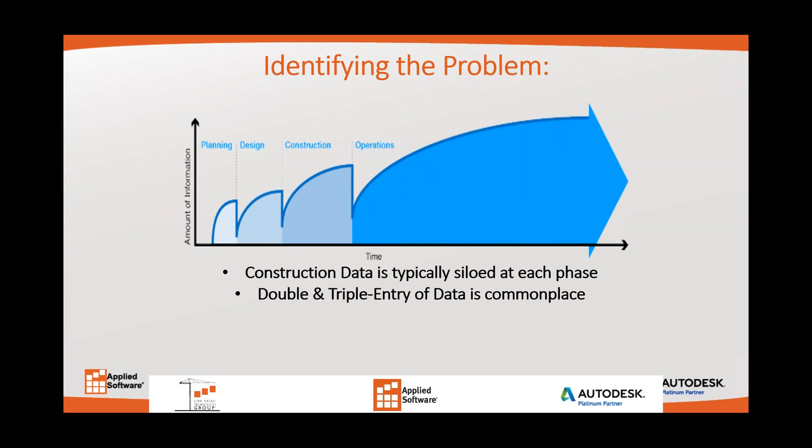So most of the construction data that we get is lost at the handover of each construction phase, and so a lot of times that causes double and triple entry of data and a lot of wasted time. Also, currently a lot of field teams don't trust the model because of the data loss. So there's a frustration between the field team and the BIM team.

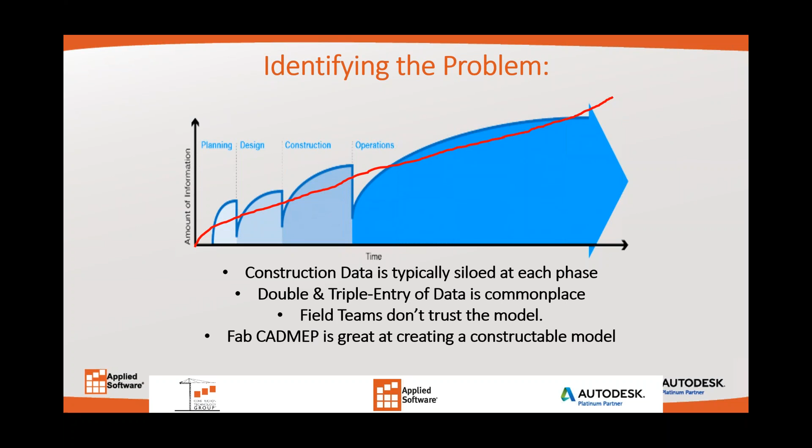So what we want to do is we want to take these peaks and valleys and we want to make it a slow, steady incline of data in our model and for our construction site. And design programs like Fab CADmep are great at creating constructible models and at collecting data, but they do need a little bit of help getting that data out of the model and into the field.

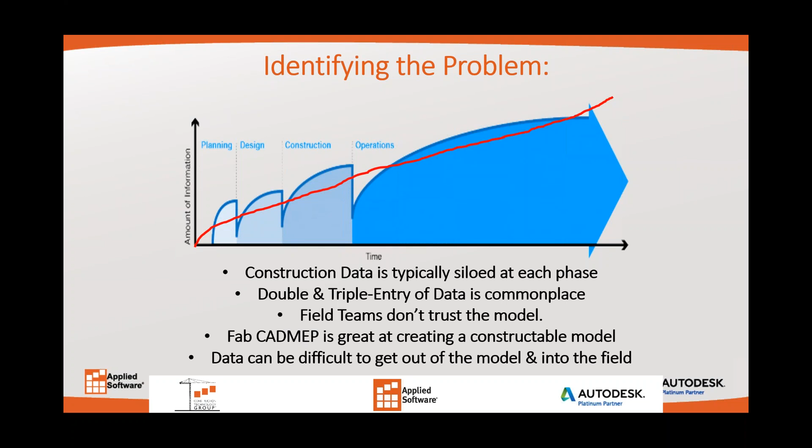So what we suggest is leveraging your fabrication data into the field. So using our FAB to BIM 360 add-in in Fabrication CADmep, you can much more easily manage and leverage the data all the way from design to coordination to construction and then finally to turnover. So the demo that I'm about to show you will give you an example of how you can do that.

So I'll quickly go over the workflow here. We're going to start in CADmep and push the model up into BIM 360 Glue, where we can coordinate and revise the model. Then once coordination is complete and we have a fully coordinated model, we will use our FAB to BIM 360 tool to essentially attach spool data, or attach data to blocks, so that we can push that data into BIM 360 Glue, okay?

And then eventually into BIM 360 Field so that we can track the status and all that data during construction. So while we're in construction, we can attach submittals, shop drawings, O&M data, any COBie data, track statuses, etc. And then eventually, once it's time to turn the project over to the owner, we can very easily push everything into Autodesk Building Ops so that the owner can better operate and maintain his building. Okay, so essentially that is the workflow that we're going to go through today.

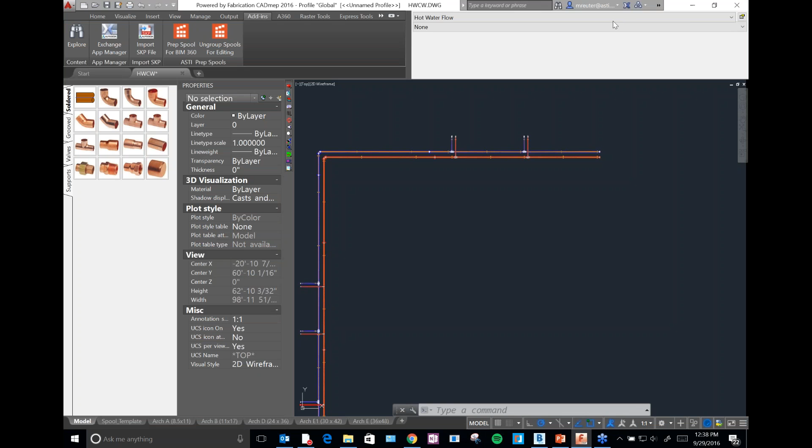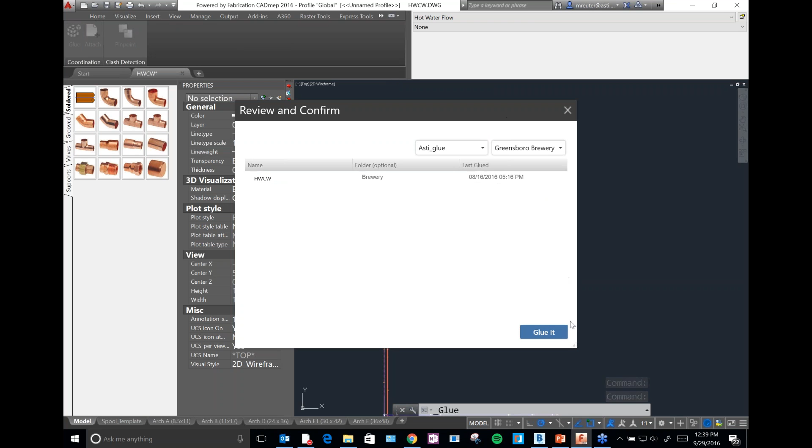So we're going to start in FAB CADmep. Basically you're going to want to design your system just like you normally would, leveraging your materials database along the way. And once you've got everything ready in there, all you're going to want to do is hit the BIM 360 tab and then glue your model to Glue. It's pretty simple. All you do is select the project that you want to glue it to, and then you hit glue.

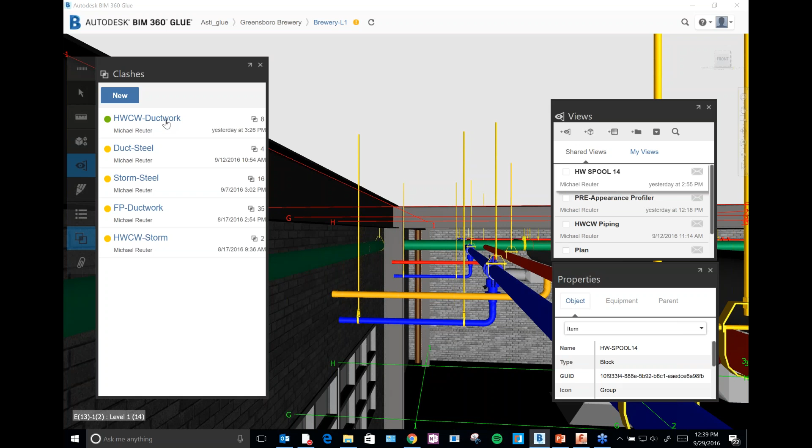So when you do that, the model opens up in Glue, and what we're going to want to do now is actually create clash tests against the other trades. So when that pops up, you're going to see actually 8 clashes show up here. So for this exact instance, we're actually doing pretty good. We're almost at the end of the coordination process.

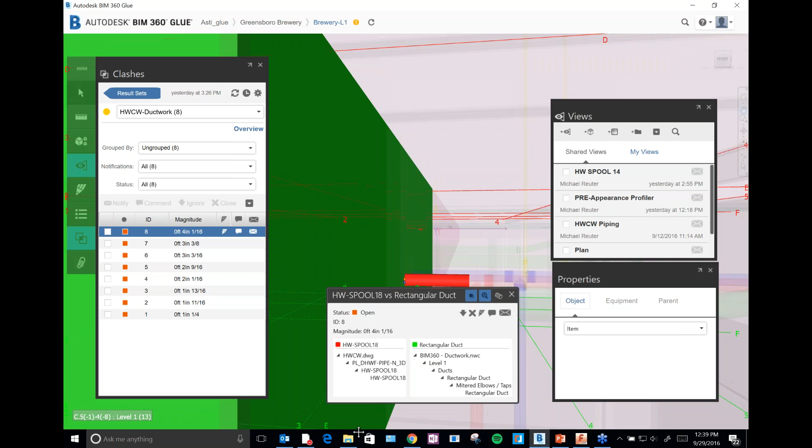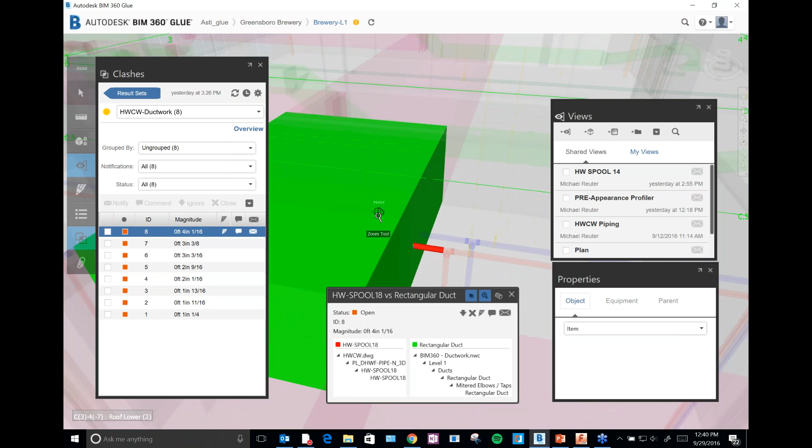So what you see right now in this clash number 8 is that as I pan up, there's a pretty major clash between the duct and the hot water and cold water. So once you zoom out, you actually see that both the hot water and the cold water are going right through this duct.

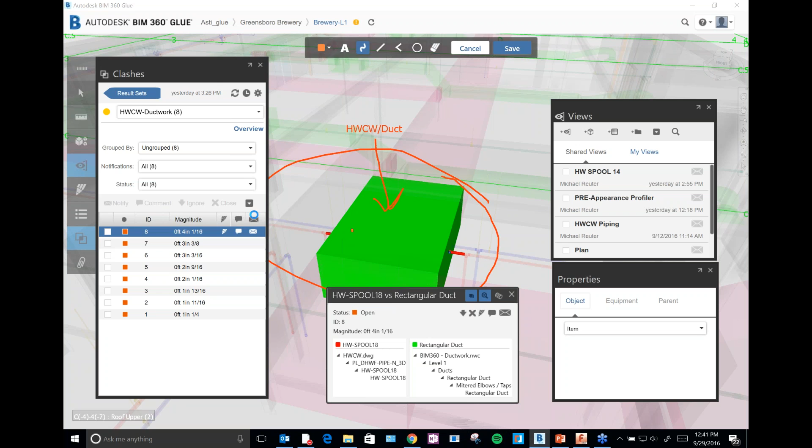So what I'm going to do is just create a markup of this, and so I'll circle it, and then I'll even put a little comment on there, and I'll say hot water, cold water versus duct. Okay, put an arrow to it. And I will save it. Okay, so next I'm going to give a comment based on maybe a suggestion or just a comment on what we're going to do here. So I'm just going to say,

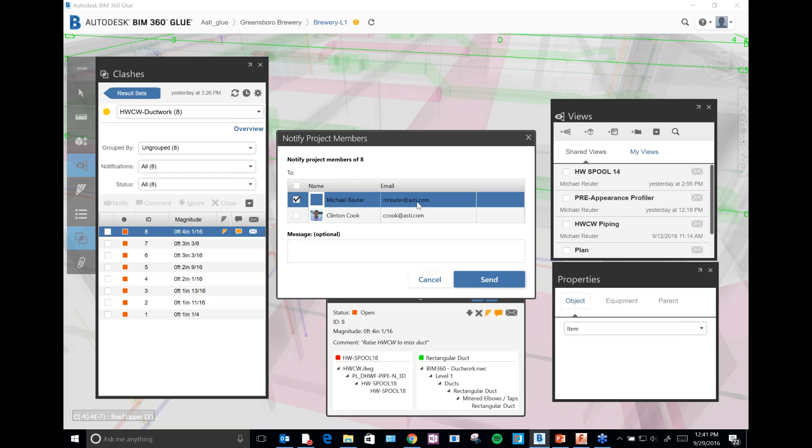okay, and so then I'm also going to finally notify members of the team of the issue. You could do that 2 ways. You could either notify yourself, or you could notify another team member so that they could do it. So when I actually do this, it's pretty cool. You're going to see here in a second that a little email notification is going to pop up.

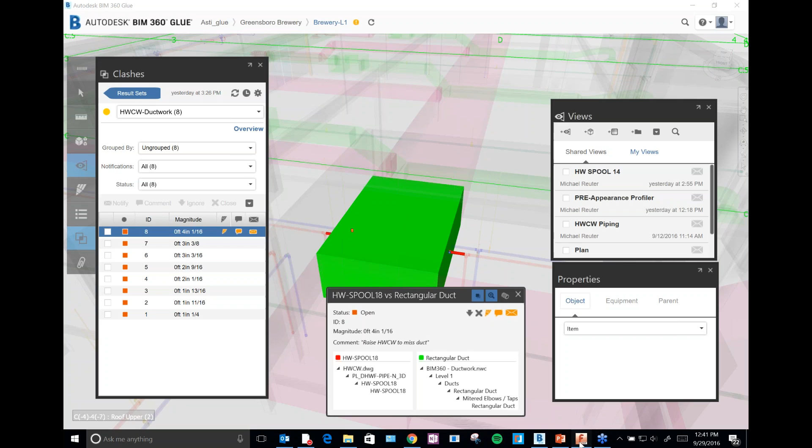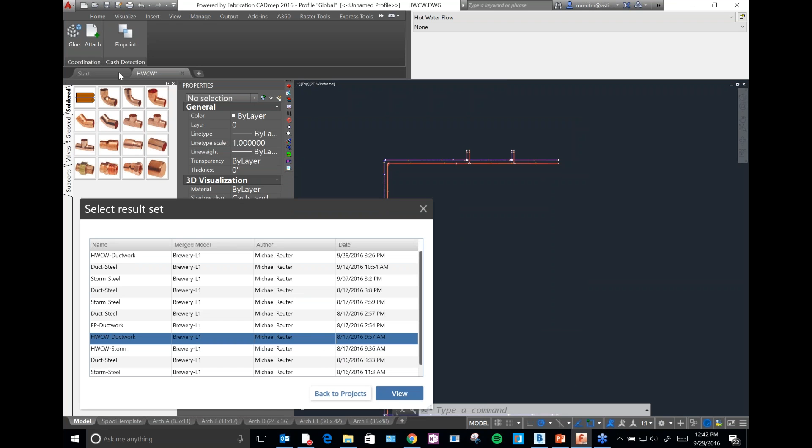So 2 things happen when you send the notification. One, you get the email, and there's a link inside of the email that when you click on it, it brings you right to this location in the model so you can see what's going on. And that's pretty cool. But the best thing about it is that it also sends information to Clash Pinpoint. So all you have to do is, if you're coordinating your model with Glue, you run your clash test, you send a notification out about those clashes, and then you hit the pinpoint button right here, and this little result set comes up.

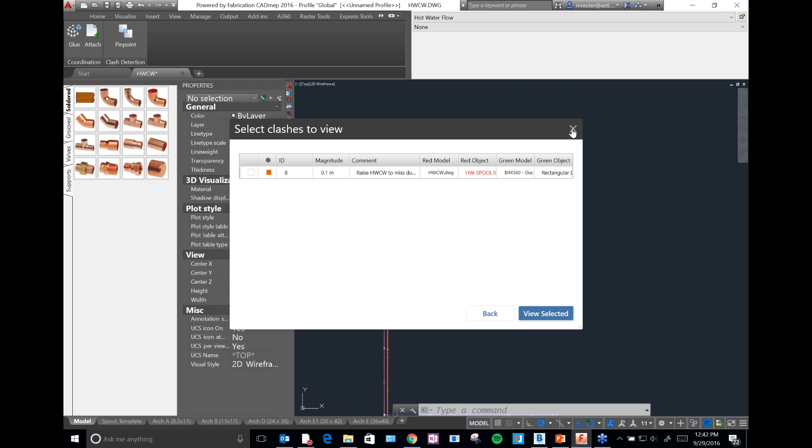So we were just working in the hot water, cold water versus ductwork. Actually, we were just working in this one because it just ran. And so we can go to view there, and what you can see is basically all of the information that we just did. Okay, so we said need to raise the hot water, cold water to miss duct. If I select this, then it would take me directly to that spot in the model. Okay, so Glue helps you quickly coordinate things, and you can even bring the clashes back into your model.

So once we're done with coordination, now it's time to start creating our spool drawings and setting up the model for submittal. So that's all that I'm going to do right now.

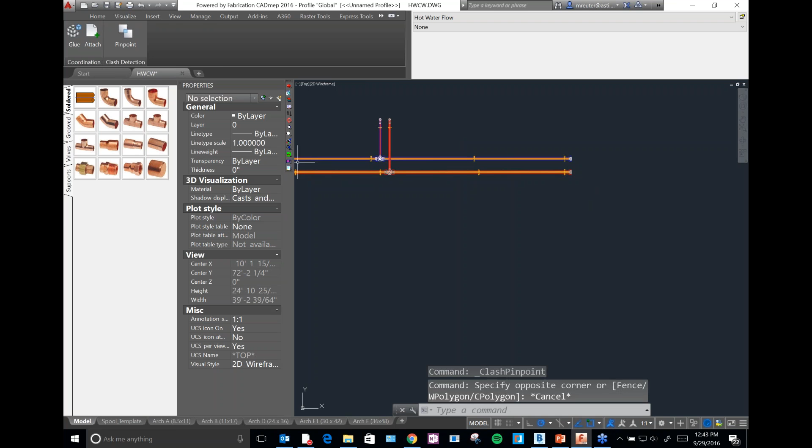So I'll just hit this spool button right here. We're going to name this hot water spool number 1, and then I'm going to select all the items that are part of that spool. Right now I'm just doing that for an example so that you can see the process.

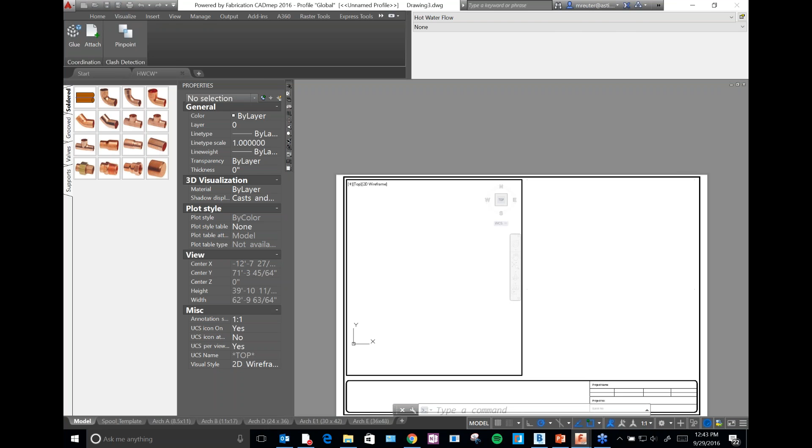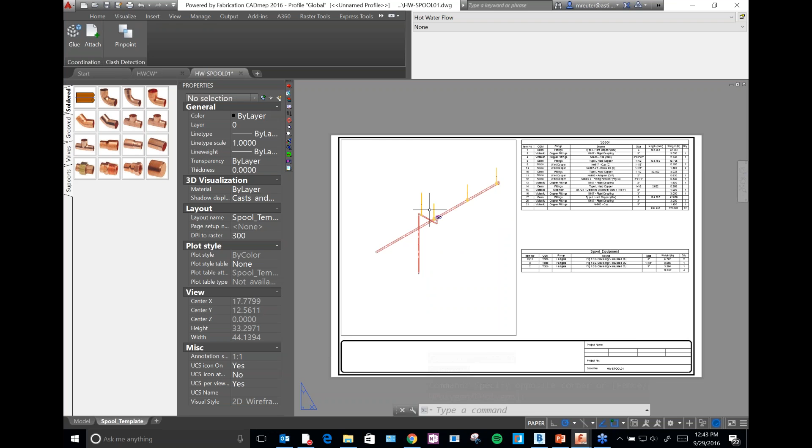Yes, okay. So then once we do that, as you guys know, it automatically creates the shop drawing essentially for that spool. You could annotate this however you needed to, and then what's great is that it automatically gives you a schedule and all the information that's involved with it. So we will actually use that later, and we'll attach that to our stuff in BIM 360 Field. But you guys are already doing that right now.

So here's where the workflow kind of changes. Once we've got all of our spools done, we actually go to our add-ins and we hit the Prep for BIM 360 tool, okay? And once we do that, we just hit Group. And when it groups, it's automatically going to group all of our data together. Okay, so it's done right there.

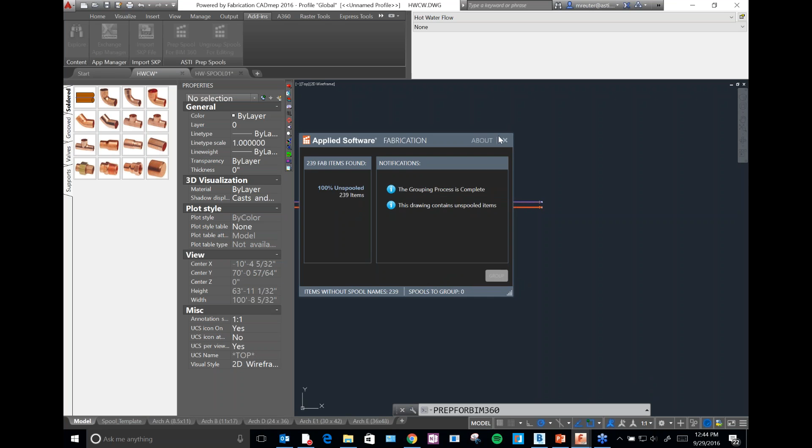So what you'll see is before, each item was one piece. I didn't spool this stuff up above, but what the spool tool did was it actually combined this whole spool into one object. So when I click on it, you see all these attributes are now added to this file. You can see the name of it, the status that it's at, what it services, the weight, material, all of this data.

We can customize this data, so if there's other key performance indicators or key indicators that you guys use, we can add attributes in here. But right now, these are the only ones that we're tracking for this project. So again, once you've got all your spools set and you've prepped your file for BIM 360, you just go back and you Glue it again.

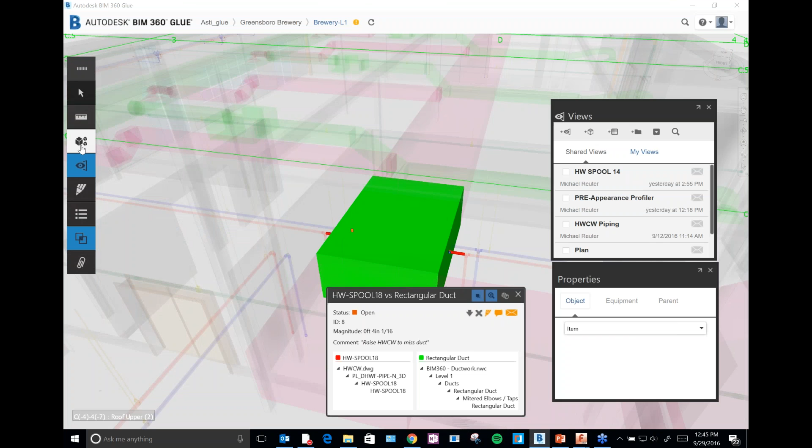So then when you go to Glue, what you're going to see is, let's see, we'll just click on this one right here. Bear with me, it's going a little bit slow because we're webcasting. Okay, great.

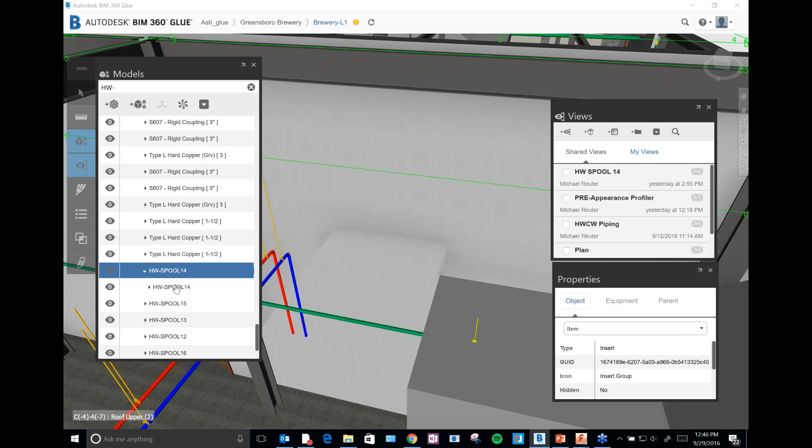Basically, once you select that item, we can go to that attributes menu in Glue, and you can see that all that data is now here. So I can create equipment types based on any of this information. I can bring any of this information from Glue into Field however I want. So all that I would do is right click and choose to create an equipment set called spool, and then I would share it with Field. Okay, so now that we've got that done, we'll actually go to Field.

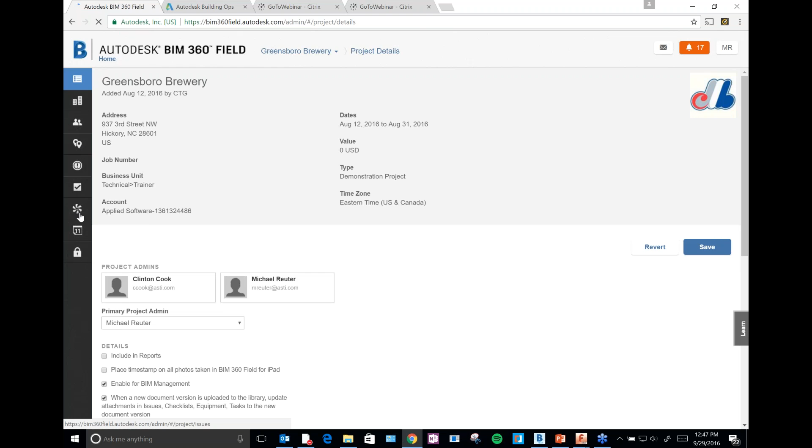Okay, so the next process is I'm going to show you how to actually map your model from Glue into Field. You just go into the project admin of Field, hit the equipment module, and you can either add a model from Glue, or since I've already got it done, I'm just going to select manage equipment mapping. You can see we've got our spools in there, so I'll show you how I mapped it.

The first thing it prompts you to do is select the equipment type. You can set this up beforehand, so any piece of equipment that you want to track, we can track, and any piece of equipment that you want to attach data to, we can do that with the FAB BIM 360 tool. Right now, for this example, we're just doing plumbing spools, so I'm going to hit next. Next, I'm going to choose to map it in advanced mode, because I want to choose a number of attributes to bring over from my FAB model into Field.

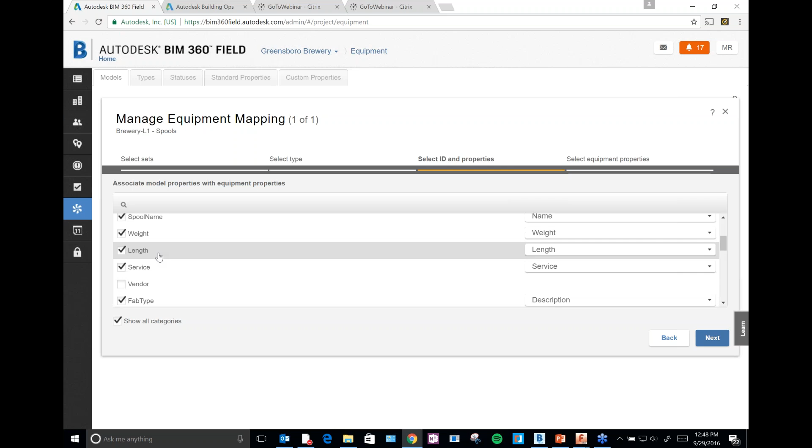So again, our attributes menu shows up here. I want all of this data that I've got selected to go from my FAB model into Glue and into Field. All of this data that we've already collected is coming seamlessly into Field, and it's connected to our model. So whenever anything changes in our FAB model, it'll also occur in Field. We've got the FAB type, the service length, the name.

Okay, so the next thing we're going to do is select the items that we want Field to push back into our model. I've just given a bunch of examples here. We've got the issues, the building location, the install date, barcode, name, the status, all this stuff. Once you're done with that, you just hit save mapping. And then essentially all of those items that are in your model would become searchable and editable in Field.

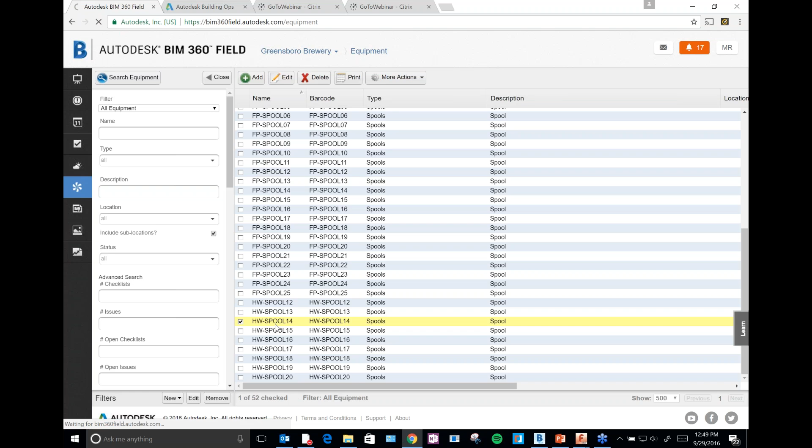So I'll show you what that kind of looks like. Okay, so I'll just click on the equipment module again, and then we'll go down to, I think we were working on spool 14. So I'll just give you this as an example. So we'll just double click on hot water spool 14. And so you can see all this data is already in there.

So, let's say that we had maybe the status of this change, so we can actually change it right here. Or maybe we got a little bit of data information, and the spool was actually installed today, so we would actually want to mark the status as installed. Okay, well, we could do that. And so when we actually do that, you can see that the process is pretty seamless. So I'll show you right here.

Again, bear with me. Okay, so you can see that it changed. That stuff already updated here. So we've got the install date, and we've got that the status changed to installed. So that took literally 5 seconds, and then the database notified Field and Glue that everything changed.

Okay, so let's review now. Okay, so a couple things to remember about FAB BIM 360. So we created it to simplify the equipment tracking process for construction, specifically for fabrication models. And what it does is it sends data to BIM 360 Field and Glue that otherwise would have been lost and or re-entered during the process.

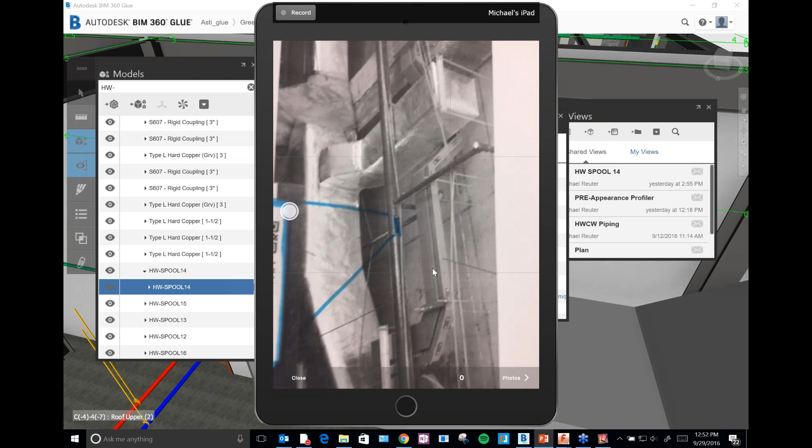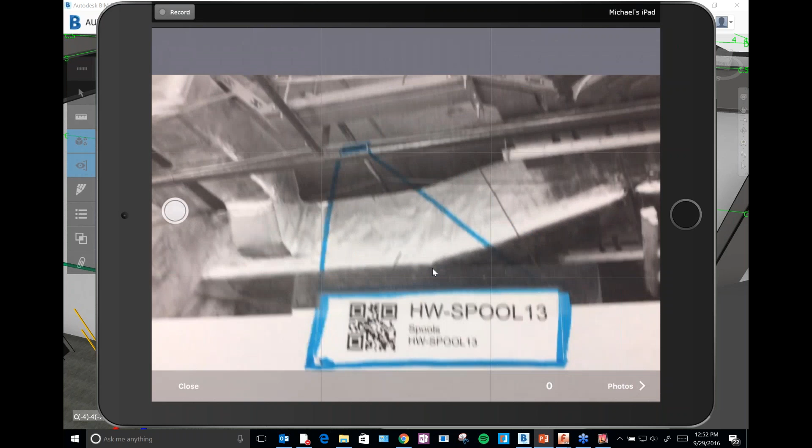Okay, so basically what I'm going to do right here is, well, I'll show you. I'll just take a picture first. So essentially, let's just imagine that we just installed this run of pipe right here. Okay, so then when I look closer right here, I actually see that there's a barcode right there. And so, right here, you see there's the barcode when I look up at it when I'm in the field. Okay, so I actually want to scan that barcode.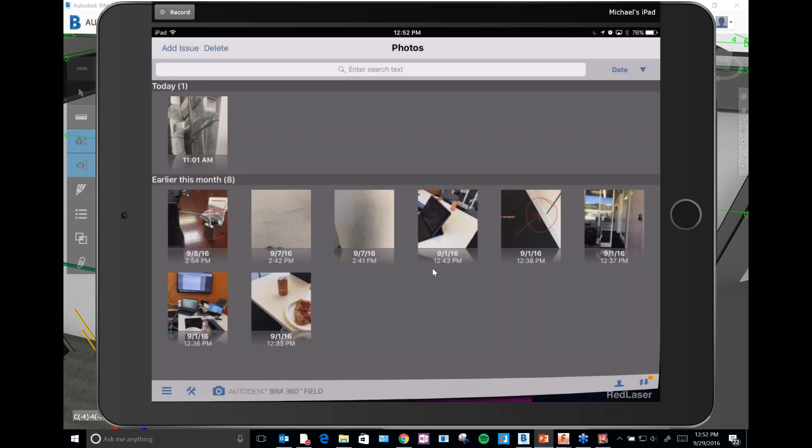So I just hit the barcode scan button in BIM 360 Field, and then bam, it takes me right to that piece of equipment. Okay, so no longer is your team fumbling around trying to search for information or trying to figure out if this is the piece that I need to install right here, or is it that piece that's 30 feet away. You slap a barcode on it before you come out into the field, and then you scan it. So all of this information is at our fingertips.

So again, just like before, we can change the status to installed. We can fill out any checklists that are associated with this piece of equipment. So if we have any testing equipment or something that we have to check off before we install it, we can fill all that out. You can see any issues that are associated with it, and then you can see attachments.

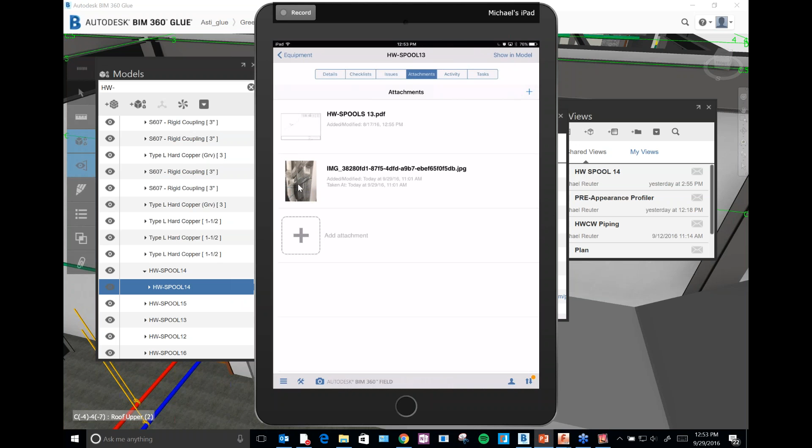So what you can see is basically I've taken a picture of this spool actually installed in the field, and then you can also see right here that we've got the spool shop drawing, and it has all the data that's with it. So basically you've got all of this data that's in the hands of your team.

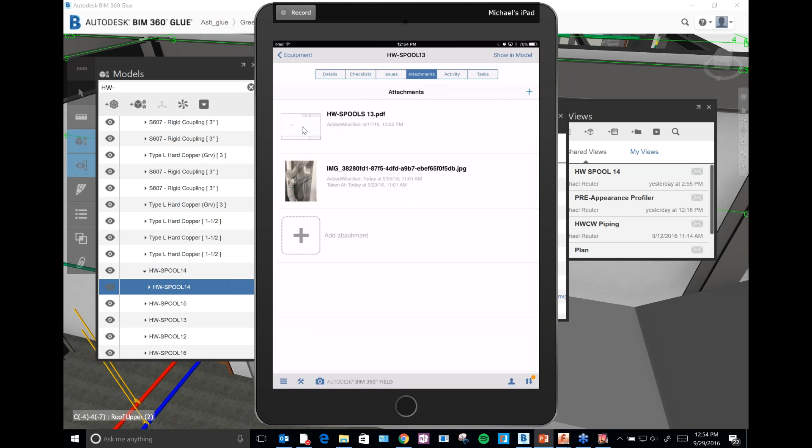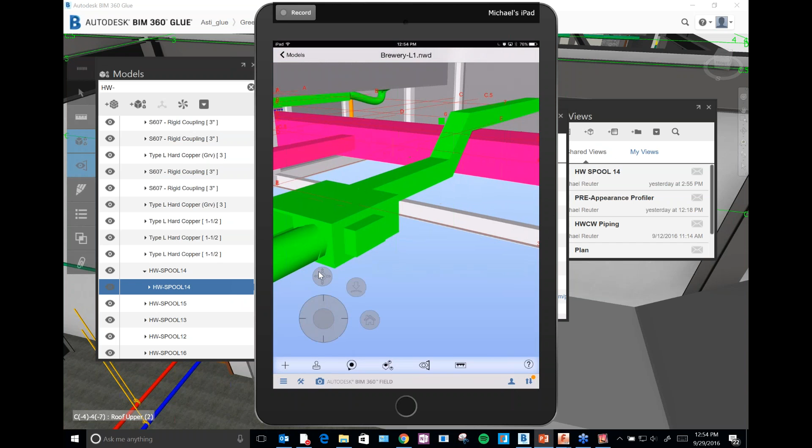But also, if you click on this little button up here, you hit show in model, and then you can see right here, this is the spool that we're looking at. So I can look around it, I can compare what I'm looking at in the field. So if I just hit this immersive view button, then I can just basically look up. Ooh, I'm making it angry. But basically you can view it and compare it and contrast it.

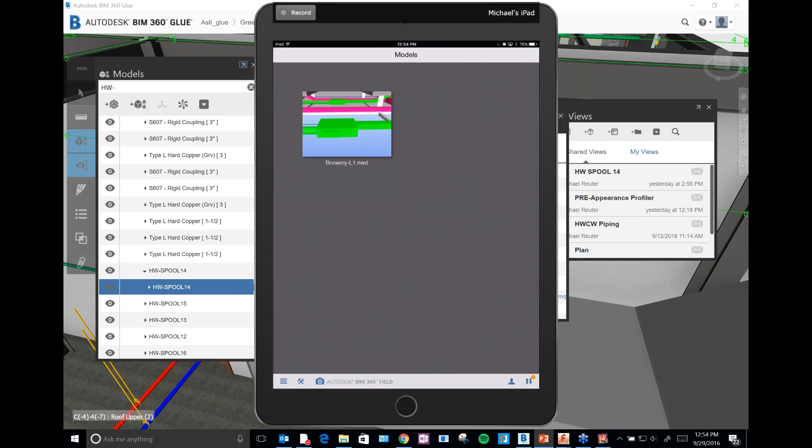Okay, so let's move our iPad off the screen. Okay, so once we've completed construction, we've commissioned everything, all that stuff, it's really quite simple to export all of our information, all of our asset or equipment information, to a facility management software.

We suggest using Building Ops because it very easily, seamlessly sends it straight to it. All you do is click the Export to Building Ops button and it pushes it there. But if your owner uses something else, then you can just as easily export everything as a CSV to Excel.

Okay, so if you were to push it to Ops, basically what you would see is you could view all of this data. The owner could view all the tickets, any context that they need to have, any inspections that have been made or need to be made, and then they could also view the assets. Okay, so I believe we were looking at, I think it was number 13. Let me review it again on my iPad, make sure. Yeah, so it's spool number 13.

So we can go down here to spool number 13, and you can actually see all this data is pushed over. Like the spool data has, I haven't hit it again so the photo didn't come over, but also if there was any manufacturer model data, serial number data, that would basically be in there. I'll show you that too.

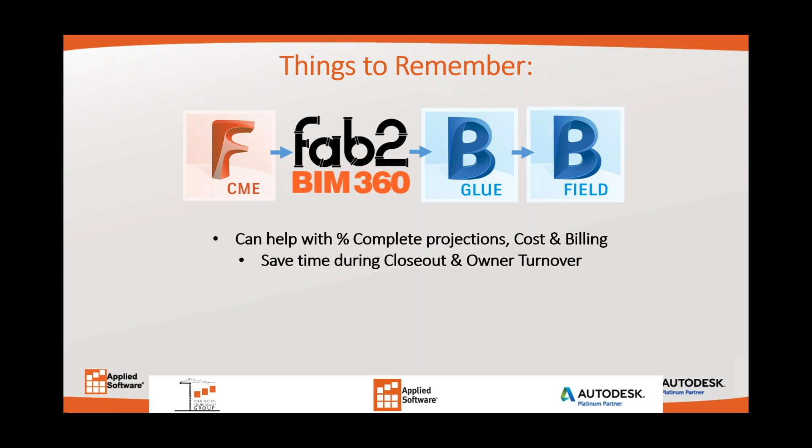So this process can help with percent complete projections, cost and billing. It'll save time during closeout and owner turnover because you're not going to have to re-enter data. It's going to build confidence in the model among your team, and then data pushed from FAB and Glue models can be tracked and reported against during construction.

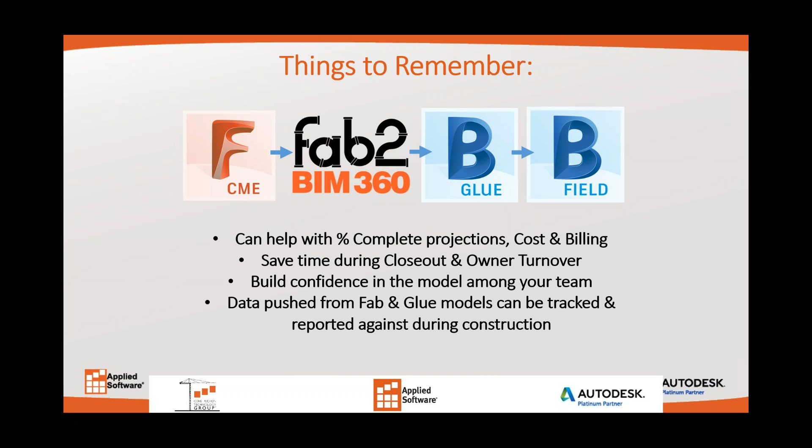So how does it help the field team? Data flows seamlessly from one software to another, so there's no worry that they're not going to have what they need. All of your tools are at your disposal. All of the job site information is at your fingertips, whether it's on your iPad or on your computer. And you can customize the data in your models to benefit your field team the most. And then also you can visualize it in 3D and compare the model to the real world in real time.

So that was my presentation. Are there any questions out there? I was actually answering some questions as we go here. There's a couple of good ones.

First question that's just coming in now is, does the data flow two ways or back to the AutoCAD model? So is it bidirectional? Well, right now, data can flow directly from Revit to Glue to field and then back to Revit. That's something that we would be interested in actually doing with AutoCAD as well. That has not happened yet, but that is something that we are interested in doing.

Sorry, and I'll kind of expand on that. So that's something that we would want essentially, down the road, for our FAB to BIM 360 tool to accomplish. Okay, next question, William.

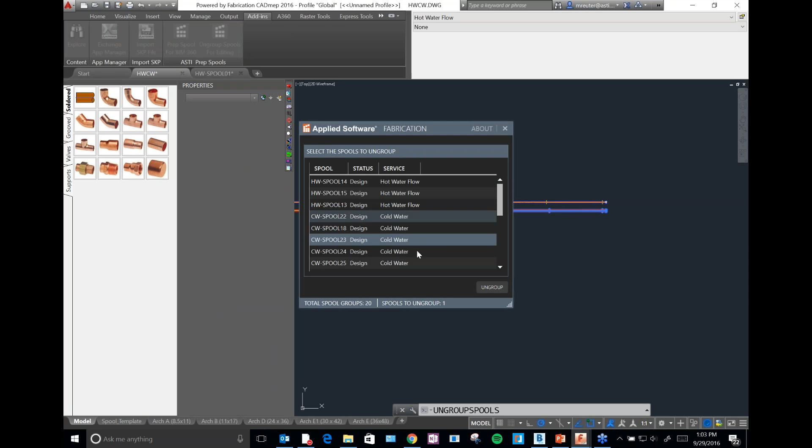Is the ungrouping of spools a global effect? If you ungroup them, does it affect all of them? No, you can select which one you want to ungroup. You can select all of them, or you can just deselect one. So you can do discrete selections then for that? Yes. Good question.

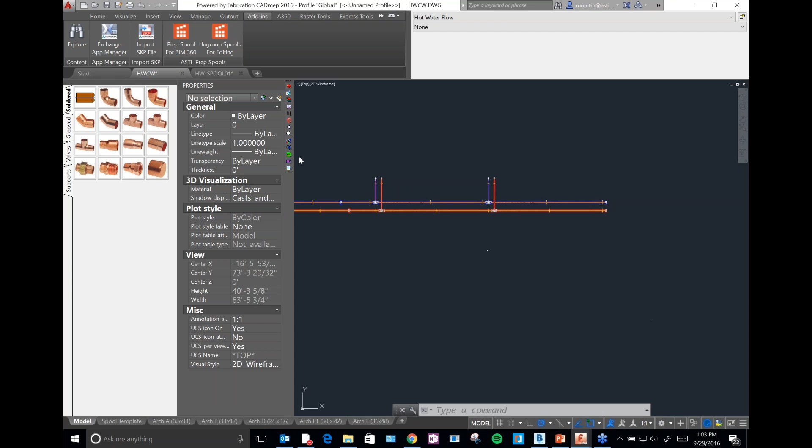Thumbs up. There you go. All right. It's nice when we find out we thought of everything. But as you guys use this, of course, there's going to be things you find that it doesn't do or could do better. So always send us feedback. In fact, Mike, what's the best way for them to send feedback on something like, hey, I would love it if it did this or that?

Well, the best way would be you contact me or David or any one of our FAB specialist guys, and you say, hey, this is what I'm trying to track. This is why. Can you help me put that in? Ron Geyer is the guy that developed this add-in. I told him that I wanted to also track duct systems using this, and the next day he put it in. So it was a really quick turnaround. Whenever there's a new service pack, he's diligently working to have this up. So we get stuff in and out really quickly.

Perfect. I had another question from Greg Mosher asking how secure is our costing data. Do you need more information, or do you know what he means? I'm assuming that he's asking if the cost data can be seen by the GC or something like that. That's a great question. That might be something that you would not want to have. Maybe you would not want to push that into field. I don't think that there is a way to actively hide that information in field, unless you're just not bringing it over.

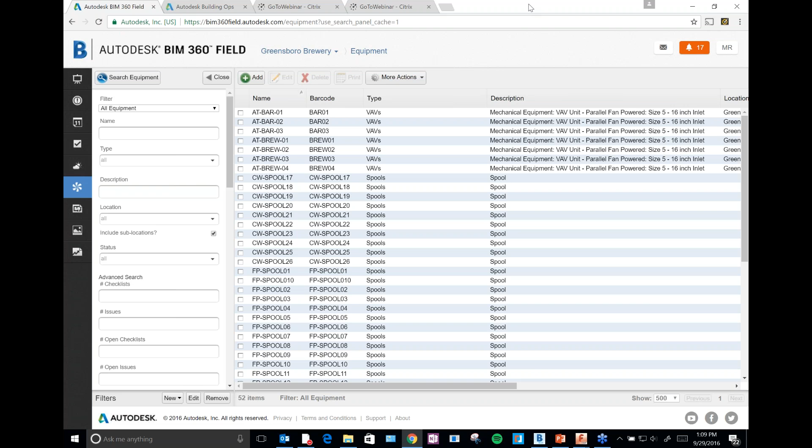So if we were going back before, if we wanted all of this field data to come back into a Revit model, you could export this as a CSV or to Excel, and then import that in with our BIM Connect tool, and then it would automatically do it. Okay, push data from Revit. Yeah, this is similar to that, but this is for FAB.

All right, and one other question came in. Were there any plans for Docs? That's a little broad, but maybe you know what he means. Okay, yeah. So I'm thinking his question is, is it going to connect to Docs? And the answer is as soon as the API becomes available, we will try to push that to Docs.

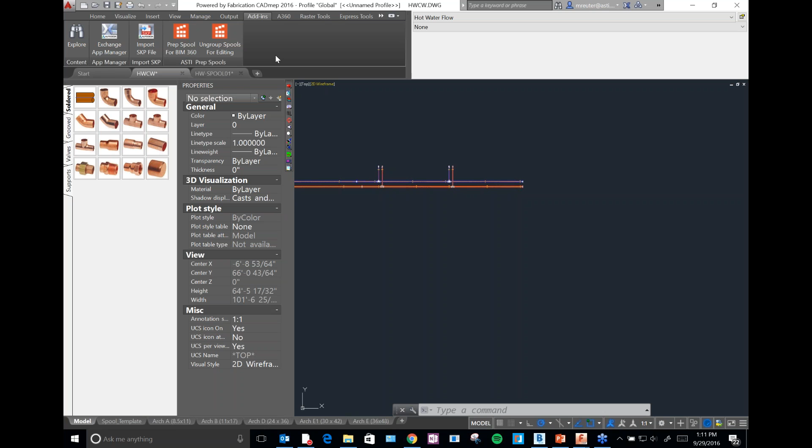Right now, the only API, at least that I was aware of, that Docs has is with adding members and permissions and stuff like that. So there's not really a way to add data in, like models, so you can't seamlessly push a model to Docs yet with an API call. You can do that by pushing it up there manually, but you can't do it with an API call yet. So as soon as they've got all that available, that's something that we'll definitely be looking at implementing. Cool.